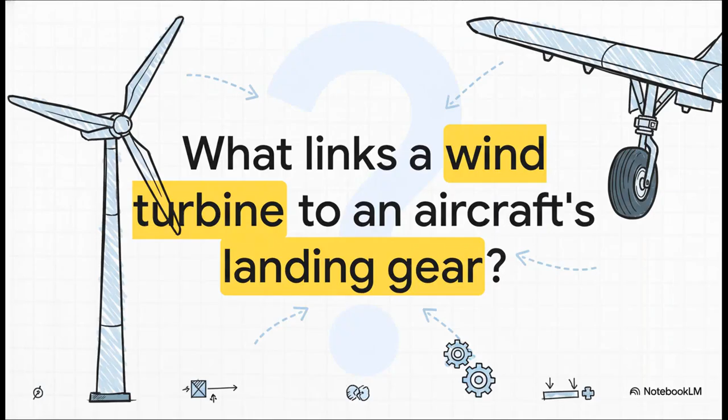So let me ask you something. What in the world connects a massive, modern wind turbine to the landing gear of an aircraft? Think about it. One is harnessing the wind, the other is taking this incredible violent force of a landing. They seem like they're from totally different universes, right? But they share this one critical common vulnerability. Any guesses? Well, if you guessed the gear, you'd be right.

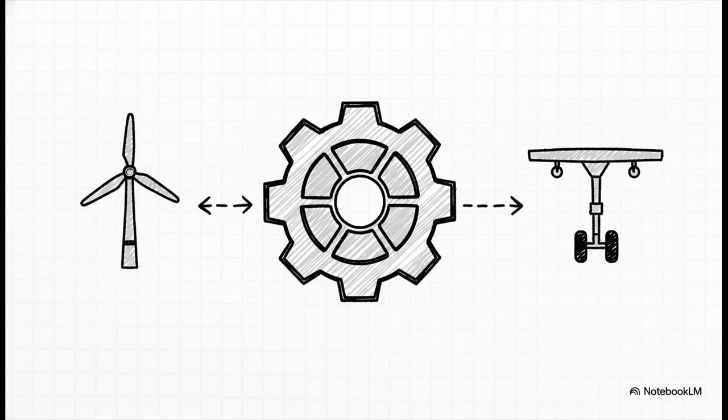It all comes down to one of engineering's oldest and, frankly, most essential inventions. These little toothed wheels are the invisible workhorses that translate power into motion in pretty much everything, from those giant turbines to that landing gear. They are absolute marvels of precision engineering, but, and this is the big but, when they fail, the consequences can be, well, catastrophic.

Okay, so here's our game plan for this explainer. First, we'll talk about how the world literally runs on gears. Then, we'll get into the nitty-gritty, the anatomy of a failure. After that, we'll look at how we can listen for cracks before they happen. Then, forging a stronger gear. And we'll wrap up with something really cool, a future that is programmable.

First up, the world runs on gears. And it's really not an exaggeration to say that. They are the hidden heart of countless machines, just humming along silently in the background. But here's the thing. This total reliance means that one single point of failure, one tiny gear breaking, can create a massive, massive ripple effect.

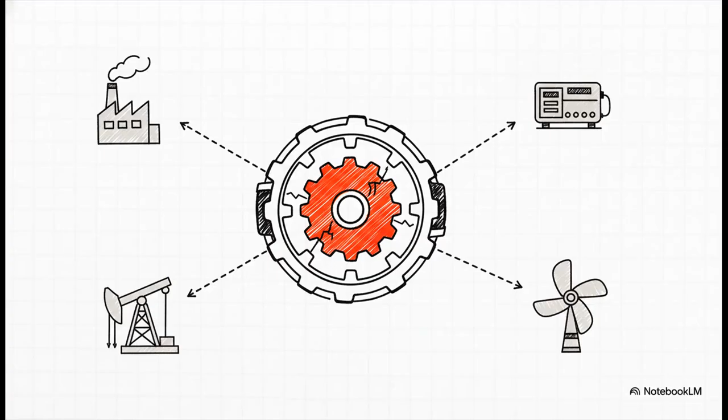And get this, this is the key point. Gear failure is not some rare freak event. Not at all. The research is pretty clear. Over 30% of all failures in any kind of rotating machinery, we're talking industrial pumps, power generators, you name it, can be traced right back to the gearbox. It's kind of like the Achilles heel of modern mechanics.

Okay, so that brings us to the big question. Why? Why do these incredibly precise components, forged from some of the strongest metals we have, actually break? Well, failure is almost never a single dramatic snap. It's more like a story that's written over time by stress, by the environment, and by tiny microscopic imperfections.

And one of the very first signs of trouble is something called pitting. Just look at this. Research from Wren and his colleagues shows how these tiny little crater-like cavities start to form on the tooth surface just from repeated stress. They look small, right? But you should think of each one as a tiny red flag, a warning sign that a much bigger, much more serious failure could be on its way.

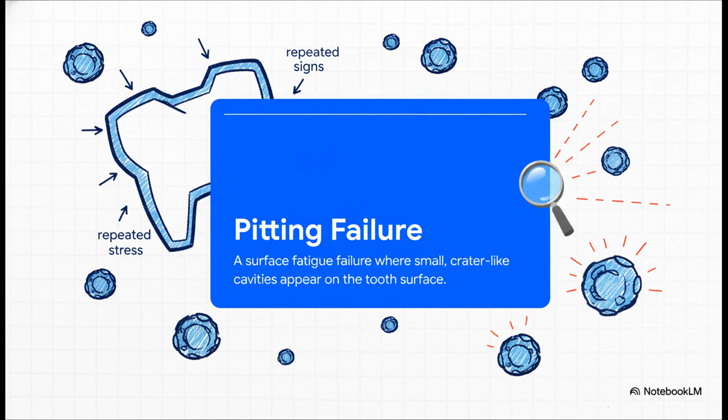But pitting is really just the symptom. The root causes? Oh, they are all over the place. As studies from researchers like Deng, Gerges, and Subban show, failure can come from almost anywhere. The metal itself can just get tired, material fatigue. Corrosion can literally eat away at its strength. The lubrication can fail, which causes the surfaces to scrape and fuse together. That's called scuffing. Or maybe the gear was just flawed from the very beginning because of a tiny, tiny error in manufacturing.

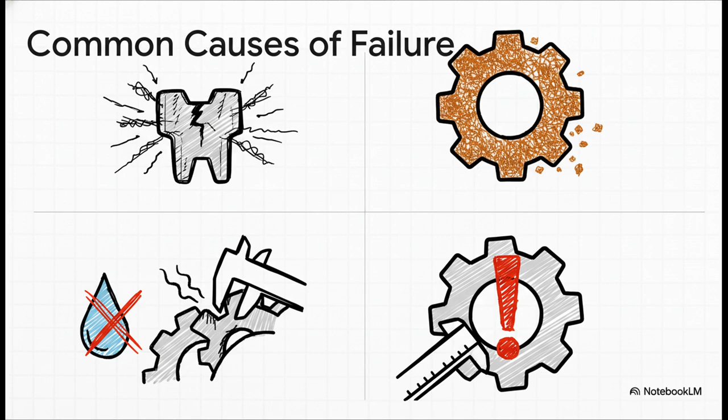All right, so knowing why gears fail is one half of the battle. But how do you actually catch a failure before it happens? This is where things get really interesting. We're stepping into the world of predictive maintenance, where scientists are literally learning to listen to machines for those telltale signs of distress. And there are two main ways they do this.

On one side, you've got vibration analysis. Think of it like a super advanced stethoscope. Researchers like Medeiros and Mansi use these incredibly sensitive tools to just listen to a gearbox's vibrations. Tiny, subtle changes in that vibration pattern, when run through some complex algorithms, can reveal the very earliest stages of wear.

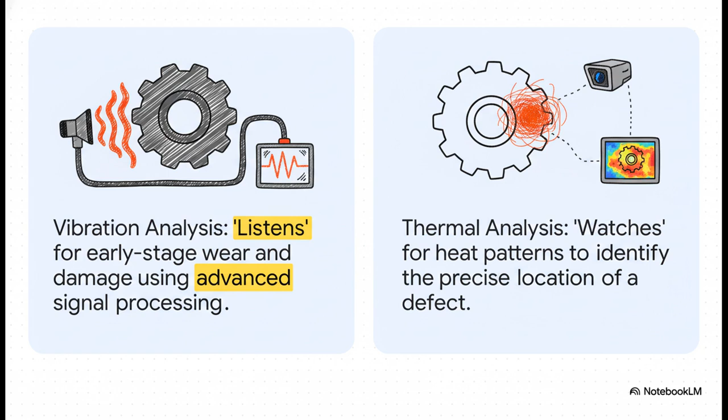Then, on the other side, you have thermal analysis. This method, which folks like Tourette are exploring, doesn't listen, it watches, it looks for heat. A fault, like a tiny crack, is going to generate extra friction, and that creates a hot spot, basically pointing a thermal finger right at the problem.

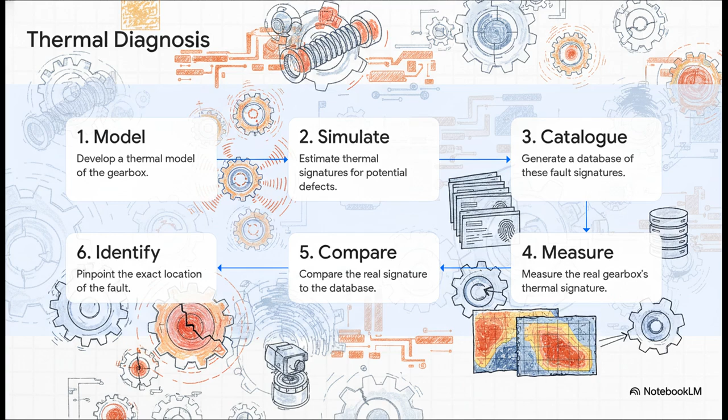A crack here, a worn tooth there. This creates a whole database of fault signatures. Finally, they measure the real operating gearbox's heat signature and just compare it to their database to find the match. It's literally like matching a thermal fingerprint to a list of suspects.

Predicting failure is absolutely crucial. But what about stopping it from ever happening in the first place? That brings us to the proactive side of things, building fundamentally better, stronger, more resilient gears, right from the molecular level. And it really all starts with the material itself.

This table shows data from a study by Hiremath, who took 3 different types of steel used in gears and applied a special heat treatment called normalizing. Now just look at these results. It's incredible. The tensile strength of the EN353 steel, that's how much you can stretch it before it breaks, it just skyrockets.

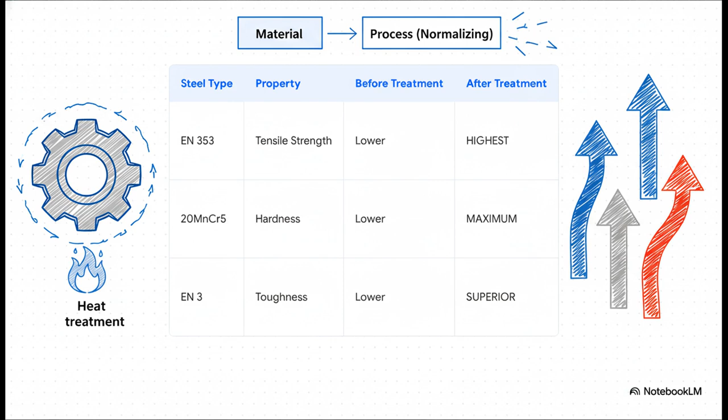The hardness of the 20MnCr5, its resistance to wear and tear, hits its absolute maximum. And the toughness of the EN3, its ability to take a punch, becomes superior. This one single process dramatically upgrades the core properties that prevent failure.

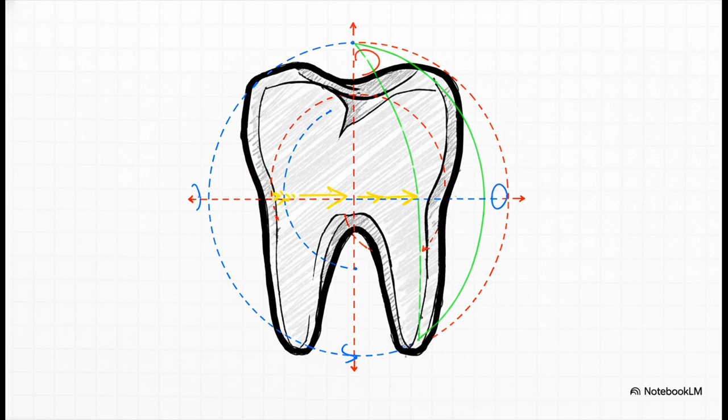But here's the thing, you can have the best material in the entire world, and it will still fail if the design isn't perfect. The actual geometry of the gear tooth, that is an entire field of science all on its own, dedicated to managing these immense forces. So engineers use these unbelievably sophisticated techniques. As Han and Shi describe, they make microscopic tweaks to the shape of the tooth. It's called modification, to better spread out the stress.

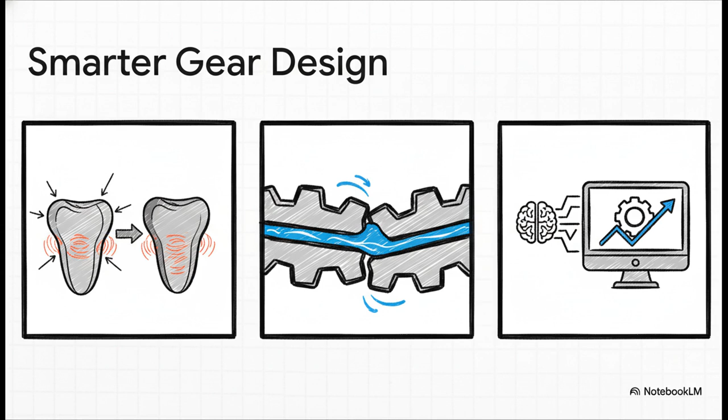You've got researchers like Zhu creating these complex computer models just to predict exactly how the lubricating oil will behave under intense pressure, all to prevent that scuffing failure we mentioned. And check this out. Chan's work shows they're even using AI to run millions of simulations to predict the fatigue life of gears in something as critical as an airplane engine.

Wow. So, we've seen how we can predict failure and how we can prevent it. But this last part of our journey, this is where we look to a future that honestly sounds like it's straight out of science fiction. We're talking about a world where the gear itself is no longer just a static, fixed object.

So, what does that actually mean? Well, imagine a gear that isn't just hard. Imagine a gear that can actively decide how hard it needs to be at any given moment. It could go soft to absorb a sudden violent shock, and then, in an instant, become rigid again to transmit power efficiently. We are talking about a gear that can adapt to its environment in real time.

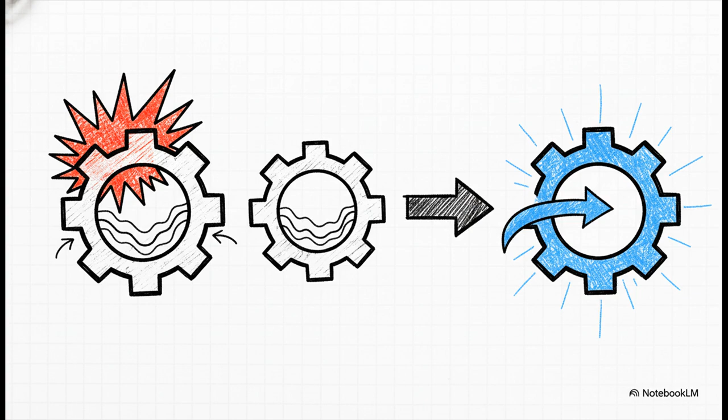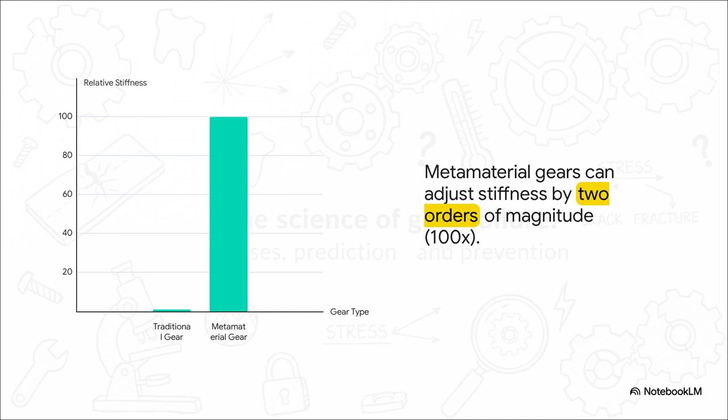So, there you have it. From the forensic analysis of a tiny crack to designing materials that can practically think for themselves, the science of gears is constantly pushing forward. And it really leaves us with a fascinating question, doesn't it?

The whole story of engineering is this relentless cycle. You identify a weakness and you innovate a solution. So as we get closer and closer to engineering the perfect, unbreakable, adaptable gear, what's the next unseen weakness that's going to be waiting for us just around the corner?